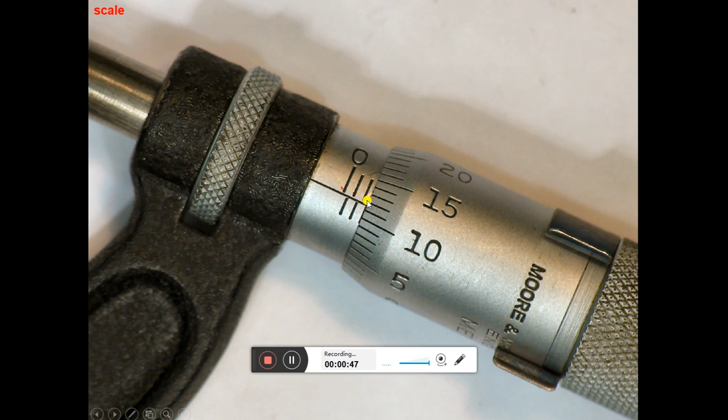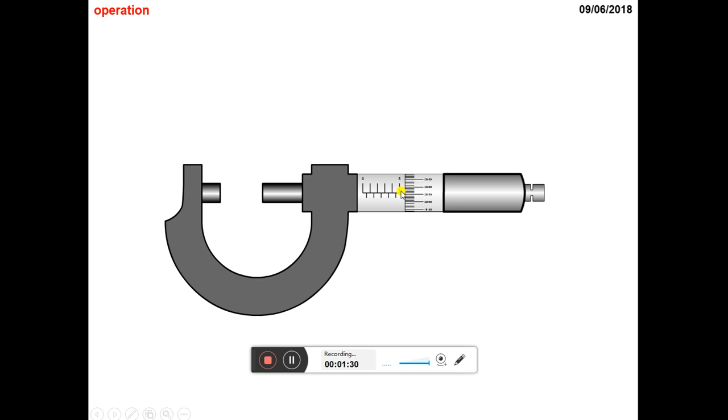Now here there's a nice applet which shows us how to do this. So when we slide our scale, we can change the reading we've got. So what we're looking at is we've got 1, 2, 3, 4, 5, 6, and then the next number here corresponds to the number of decimal places. So we've got 6.3, I think that's a 3 there, 6.33 millimeters. Now if, however, we go to there, this is more complicated because we've got 5.5 and then we've got 2.6. So we've got 5.5 plus 0.26, that would be 5.76.

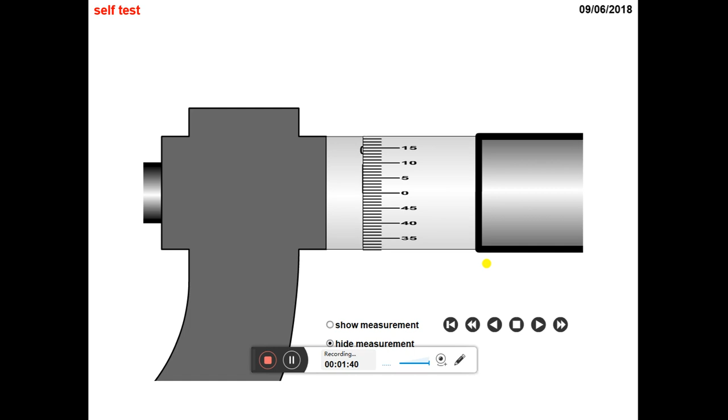So a nice larger example of that is here. Let's show the measurements so it's nice and easy for us. So if we look, we'll move our ratchet in and out. So let's have a nice look and make it a nice easy one. So it says 1, 2, 3, 4. We don't go to the next half millimeter, so it's just 4 point something.

So now we look at this scale, and it's got 30 to 35. Now the line here lines up with 1, 2, 3. So that would be 4.33 millimeters. When it's slightly more complicated, it's when we go over this half point. So here we've got 1, 2, 3 millimeters plus a half. So it's 3.5 plus, here we've got 0.38. So it's 3.5 plus 0.38, which gives us 3.88 millimeters.

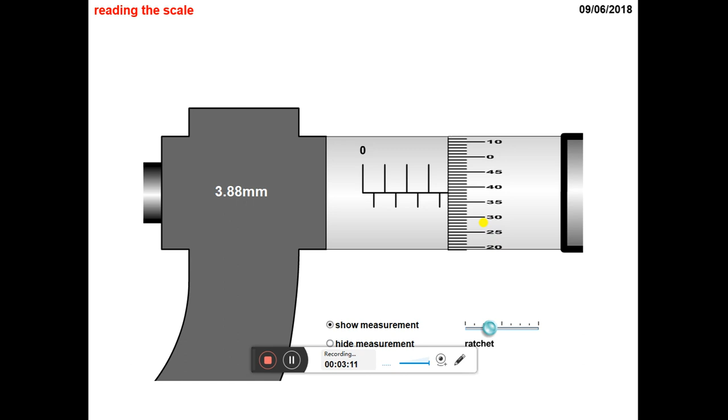Now, micrometers are not difficult to read at all. It's just really important to make sure that at the beginning there's no zero error. Typically when we use a micrometer, say we're measuring the diameter of a wire in a resistivity experiment, we would measure it several times along and take an average, a mean, so that we could identify any anomalies and remove them.

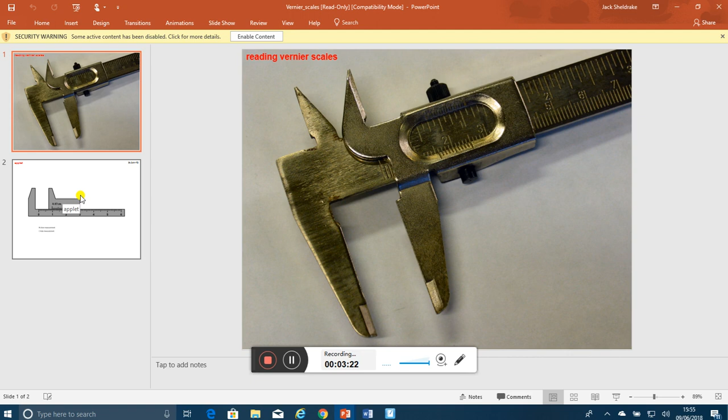Okay, and using a vernier scale is the other one. Using a vernier scale is exactly the same in that it's very, very straightforward. So that's an example of a vernier scale, and this here is how we read it. So here we've got a vernier scale. Now there was a question on this in the exam some time ago.

And some confusion arose because the students were looking between the gap here, and this was on the examiner's report in one of the previous papers. They were looking at this line here, and seeing where this lined up with this. Now, when the jaws are closed, you see that they don't close on the zero line, they close before that. So this little space here is exactly the same size as the space there.

So when we're looking at this, we're not looking at this point here, we're looking at these values here. So we're looking at where this point here, the first one, is lining up. So let's have a look. Across here, we're in centimeters. So it's saying 1 millimeter, 2 millimeters, 3 millimeters, 4 millimeters, 5 millimeters.

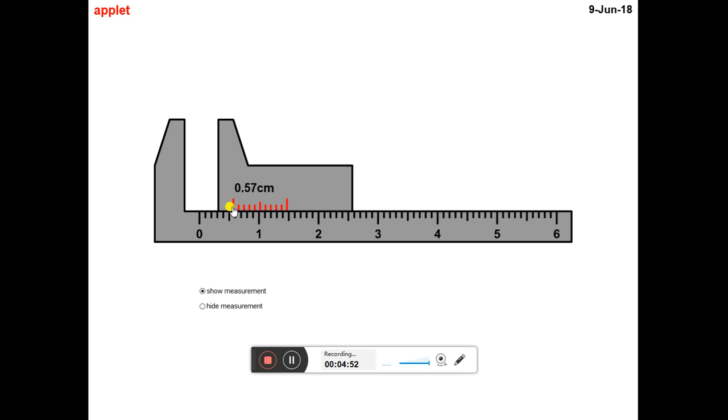Now this line here lies between 5 and 6. But we have to decide then, which point is it? In order to find that out, we look at the top scale. So we count along and see where the lines suddenly line up. It's not at the end here, it's not here, it's not there. As we go along, it seems that this point here is where they line up. So if I just show you here, 1, 2, 3, 4, 5, 6, 7. On the 7th line, that lines up perfectly.

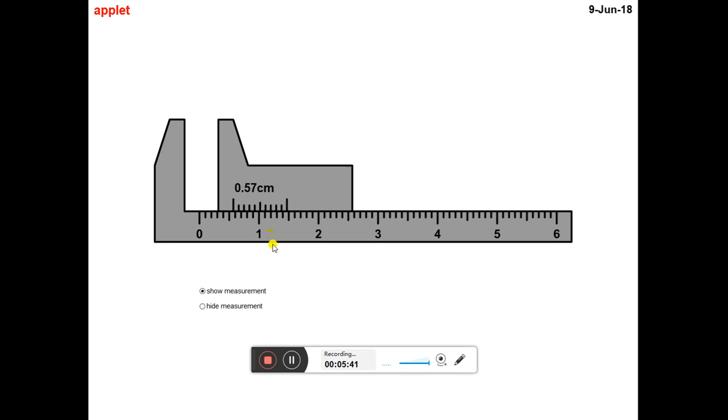So this shows us that the reading on the vernier scale would be 5 millimeters, and it's the 7th one it lines up on, so it's 5.7 millimeters, or in this case we're in centimeters, so it would be 0.57 centimeters. I'll just do another one randomly just to show you the point again.

That's all you need to know about using these pieces of equipment. There are 2 different types of vernier scale. There's this one here, or typically when we're doing Young's modulus, we use a sliding vernier scale in a different arrangement. However, the reading is exactly the same. We're just going from 0 to our first point, then our next decimal point is where it lines up on this small scale here.